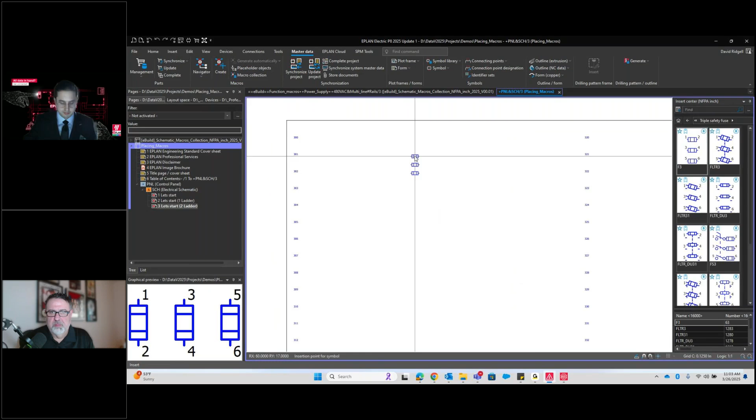So obviously in the most basic way to design, we could use symbols, right? We can go and find a fuse from the Insert Center, and this pulls from our symbol libraries in the project, of course. And then hopefully our plot frame may have some invisible stuff like this to help us stay nice and symmetrical, right? And then you can place some contacts, motor, all the different things you may need, click and drag.

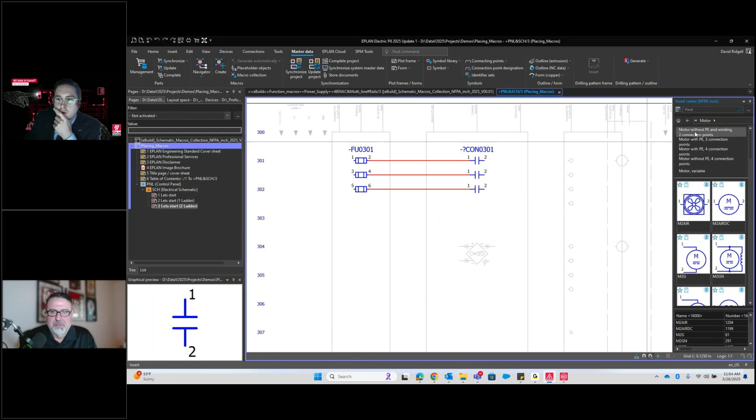You can go get a motor perhaps, power consumers, motor with PE, get your three-phase motor, right? And we have a place where to place it. Okay, so that is by far the most basic approach in EPLAN, unless we were drawing lines and text. Hopefully we're not doing that. And there's a time and a place for this.

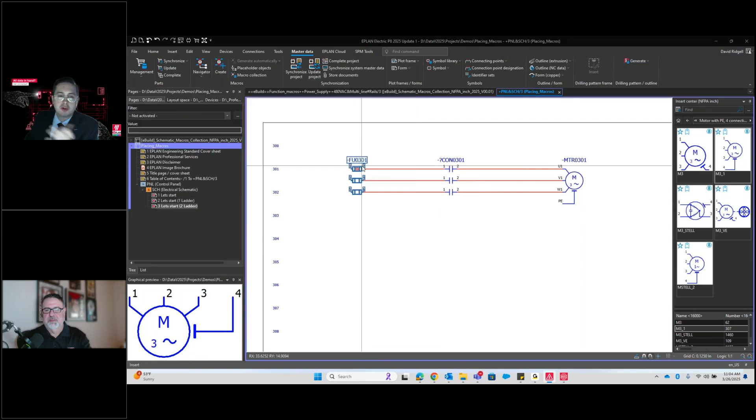Sometimes we may not know our part number and we need a symbol as sort of a placeholder. And you can of course add part numbers after the fact, go into your parts database, browse and find what you need. The problem with that is it's more of a two-step approach. So at the next level up, we would think about devices. In this case, I have to think about what symbol I need and then what device I want to place on top of it.

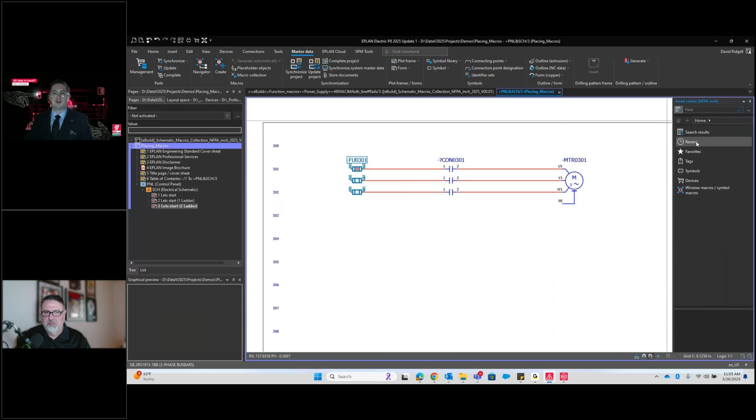The next level up, of course, is using devices because then we're thinking directly in terms of parts. If we know the part number that we need in our project, it's advantageous to use it in this way because it's one step instead of two or three, right? I can just take this part here, get the correct variant, and then place it.

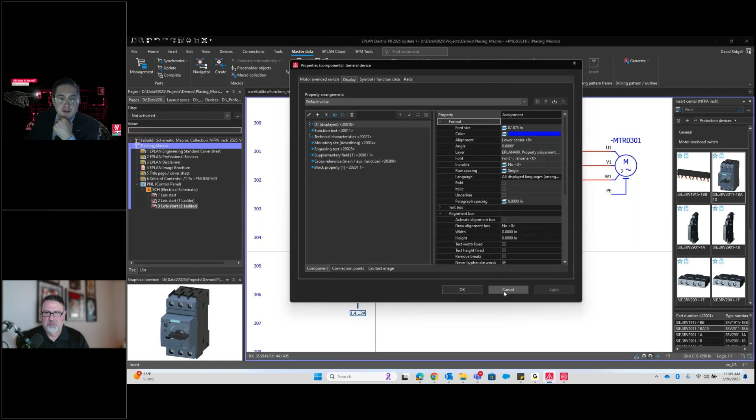And then, of course, in the background, it has all the technical information that comes from the parts management, the technical characteristics, the current range, and whatnot, and any other properties we can display here in our normal display settings. So that's certainly more efficient, but the most efficient way, besides an automation tool, would be using macros. And this is important because these are the true building block of everything EPLAN, right?

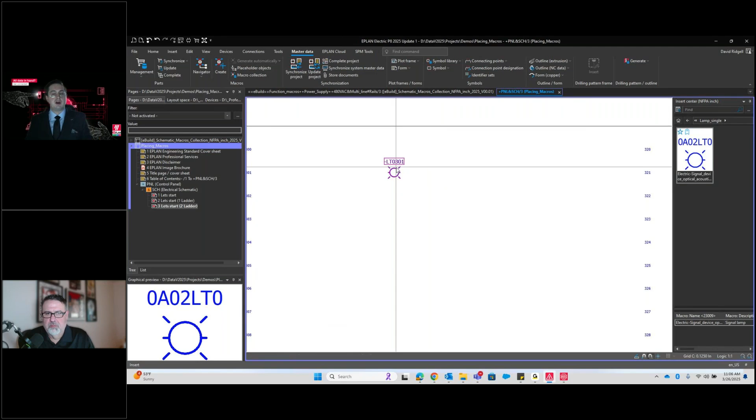So you could use symbol macros and part macros, which are tied to symbols. In this case, this is basically a symbol, but it can have some preset logic. For example, if we had some different logic that wasn't normal here, we can preset that up and save it as a macro. So that's another method. Another way is a window macro.

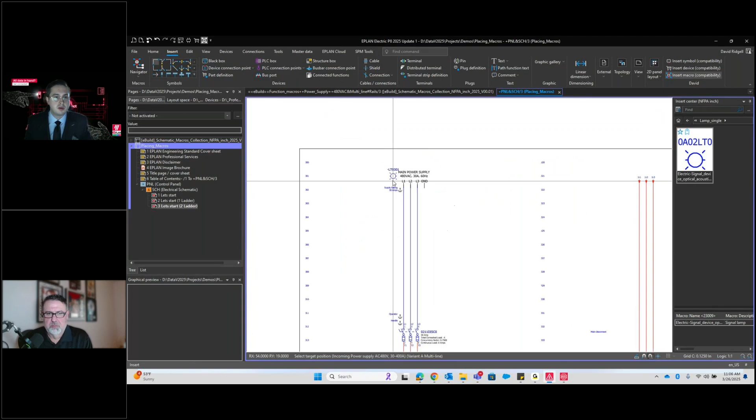Let's go to our window macro folder. Power supply. Okay, let's get the 480 volt stuff. In this method, we're really combining pieces of a circuit. So we're not placing individual components. We're placing a whole circuit or a portion of it. So I have this fuse disconnect, for example, and I can just place it to where it's designed to go.

And in the background, a macro will have two types of variations, right? It'll have a graphical variant. If you hit tab on the keyboard, you can toggle through that. An example of that, which we'll see in a second, is a motor circuit. Maybe it has one that's reversing or one that's direct as far as the contactors go. But we also have a non-graphical variation, what we call value sets. So this can drive any number of properties in the background.

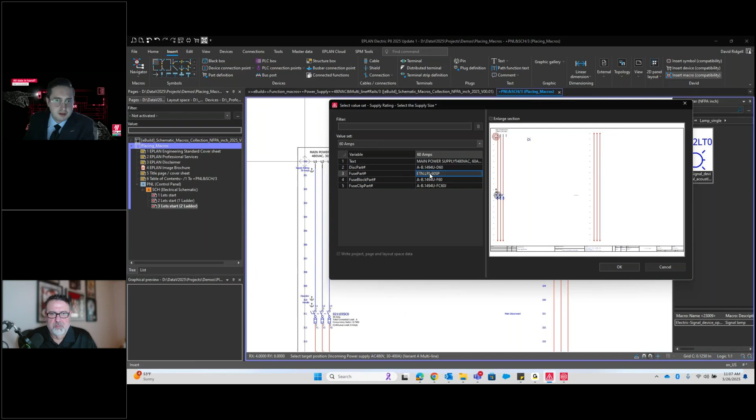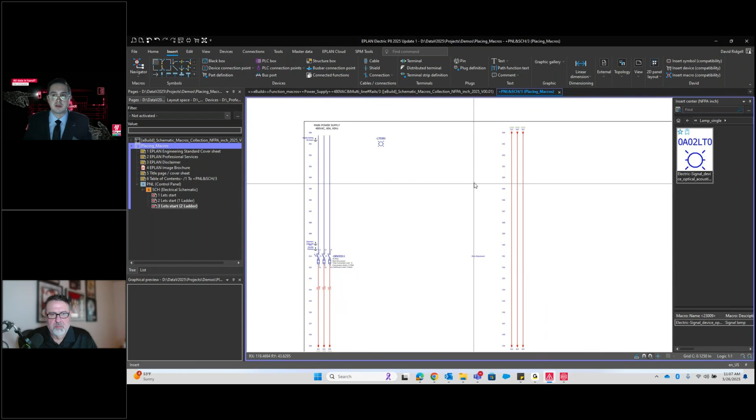So in this case, when I select 60 amps, I'm driving the path function text, the disconnect, the fuses, and any number of properties that I need to control. We can select our disconnecting means. That, of course, has an effect on the part number. And then the handle, I'll go with the painted handle there. Okay, so in this case, I brought in an entire circuit, more or less. And I can repeat that process to build up my schematic.

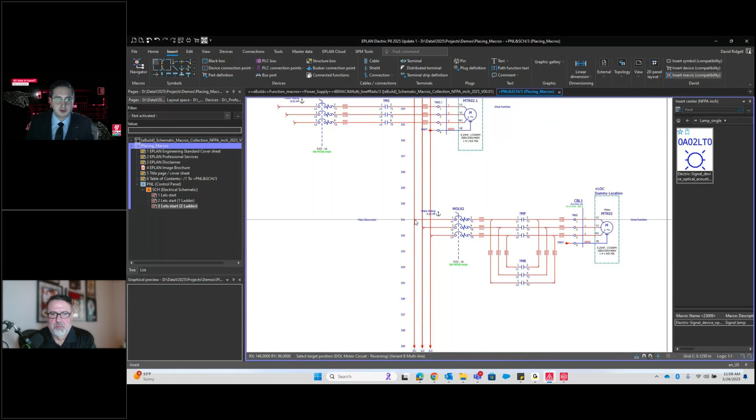If we go back, we'll go to our motor circuits. When we look at this one, double click. Oops, I accidentally placed it. I'm just going to hit cancel. I'll delete that one later. And this one will have a graphical variation. So if I hit tab on the keyboard, you'll see some different options. So I can go with this reversing one here. And then you can select your horsepower.

And as you can see here, we're driving 9 different properties from this value set, where you would normally have to go and think about changing all these, looking at data sheets. Okay, if it's this horsepower, I need this protection device. If the wire goes up to a certain gauge, we need to change the terminals. When you're setting up these value sets and these macros, you're thinking about that one time and not over and over. So yeah, you'll set up the table.

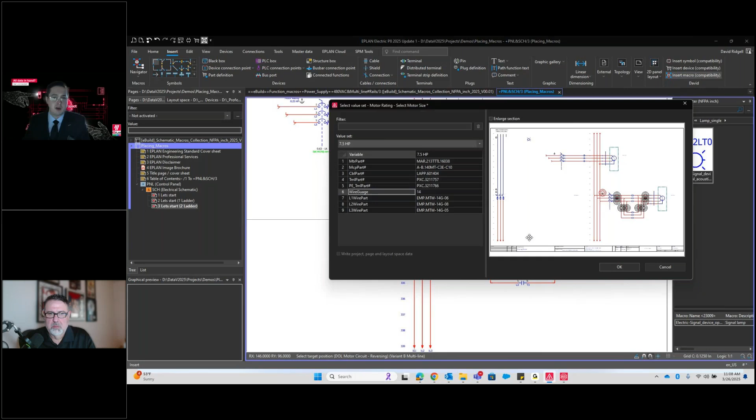In this case, this is actually public data available for everyone, and I'll show where that's at. But you set it up ahead of time, and then it's available for you in the future, right? That's the whole idea behind a macro. Go ahead and delete that and delete that. Of course, we can move it up, and we could renumber everything as well. Okay, so we renumbered our devices there.

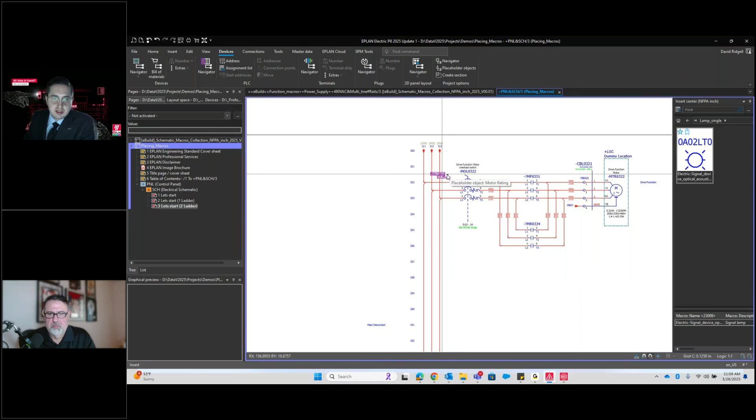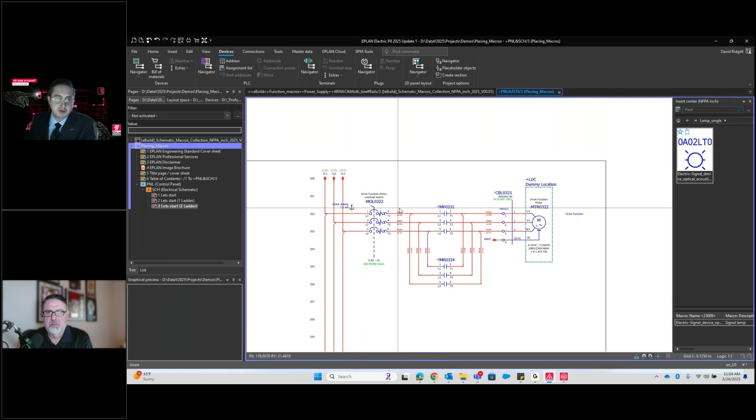And these are very important because these macros are the building blocks for everything automation. So that's our next step, right? We want to take things we would normally do by hand and set some rules up where the schematics will be automatically generated, in other words. But without good macros, there's no way we can do that. We have to use these as our building blocks. So think of them as like Legos or whatever the case may be. We modularize our schematic where we can build up the entire project, basically.

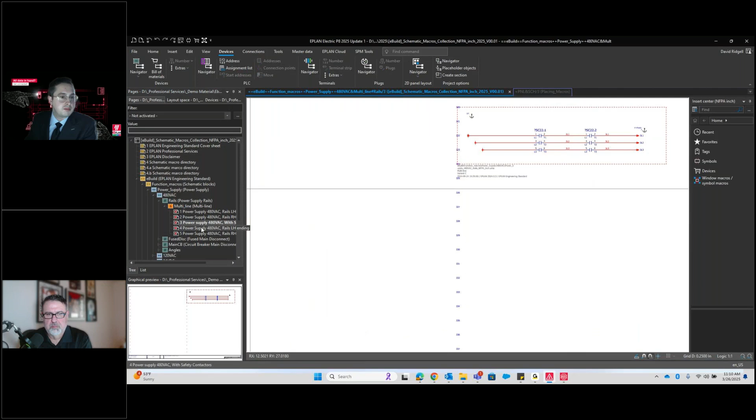And what it looks like in setting it up, here we have the macro project our automation configurator is based on. All right, so we'll always need some power rails, for example. We may need it on the left or the right. We have these different variants. We may need some safety power contactors there. We may need a separate variant for our power when it ends. If you think about the end of the power rails, we don't need it to go onto the next page to nowhere. And then of course we need that on the right.

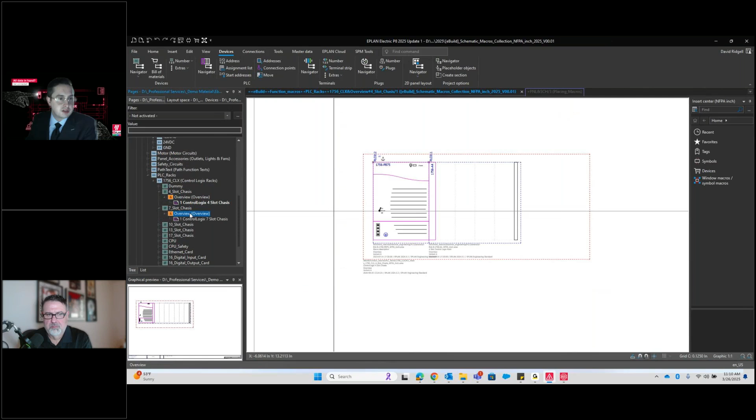We also need, of course, our PLC configurations. We'll have different configurations for a 4-slot chassis and the ControlLogix product line, 7-slot, and so on. So all this has been loaded into our configurator, and we have different rules to trigger when different devices are placed. So we can go ahead and switch over and look at that.

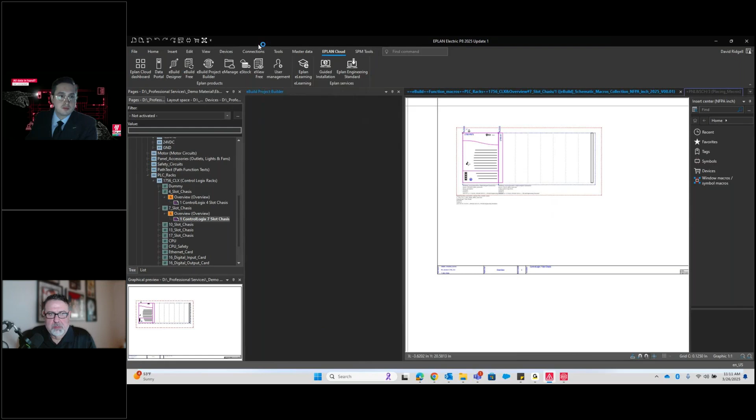The main automation product that we offer is called eBuild. This is the successor product of Cogineer. Some people in the past probably have heard of Cogineer. The difference is that this lives in the cloud instead of on premises, right? So we'll open up the eBuild project builder. And I'm just going to make it full screen here.

Hey David, while you're doing that, a question real quick: are these macros that you're using out of the box, or are those ones that you created? Yes, they're out of the box. Okay. I did make some modifications. For example, when you see this ending rail, I had to make that, but that's very simple. You just take this one and delete those guys down there, right?

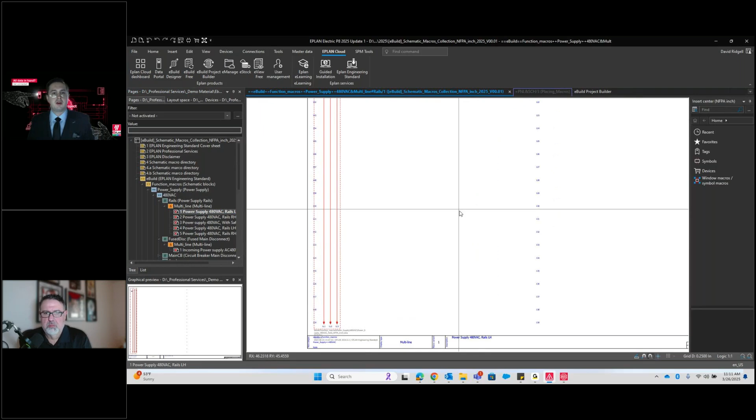I'll show you where you can find this. If you click on the Eplan engineering standard, it'll take you to this web page. And there's a lot more than just the macro projects here. If we look at what I'm currently working with, I'm working with this macro project for schematic blocks in the NFPA inch environment. That's what all these macros are based on, but of course I've made some modifications. We have an IEC version of that as well. And this is always a great starting point for a macro project, because it's very structured.

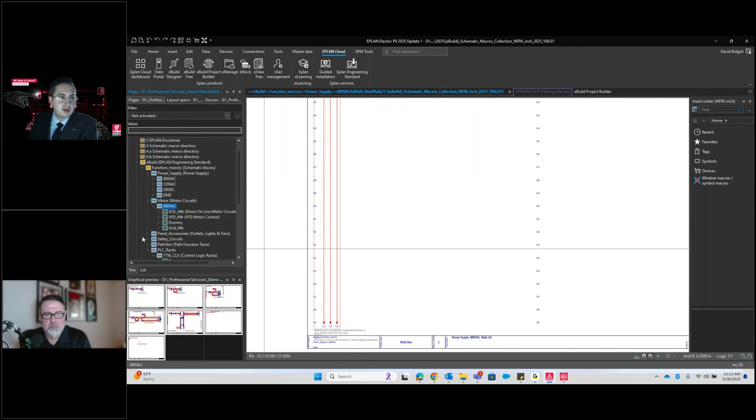If you look here, it's all structured under these different categories. So everything's nice and organized, and then we can, of course, automatically generate the macros. There's also some other neat things here. You have a basic project for your normal schematic project. Here it is, basic project for NFPA, so that'll be in the inch environment. If we open this up, you have the inch and the millimeter actually.

There's also some good application examples and samples. So if you wanted to look at best practice for ControlLogix and distributed Point I/O, or the Siemens version of that, S7-1500 and ET200SP, we have an example of that. If you wanted to have an exercise in trying out our smart production software, you can download that. So that's where I got that from.

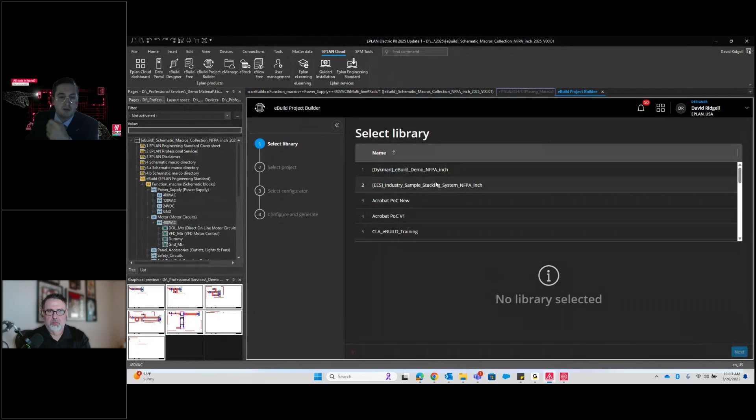Let's flip back over to eBuild and let's create a new project. We first need to select our library. In eBuild, you can have different configurators for different things. So I'm going to select the stacking system, and I'm going to select the most recent published version there, version 4. Okay, and I will create a new project. You can either create a new one or add to an existing one.

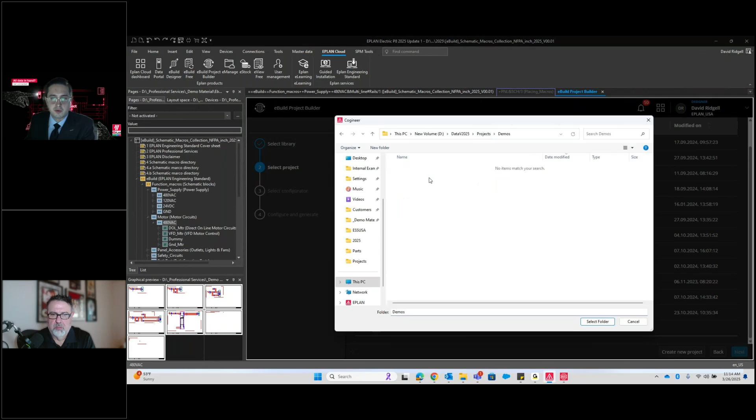And we'll just call it eBuild demo 032625. We need to select the template. Just like if you were creating a new project by hand, you need to select a basic project. That's what this is asking for. So I have one specifically for this eBuild environment. Select that template, and then we'll select our storage location. Put it in this demos folder. And then we could select overwrite or do not overwrite. In this case, it's a new one, so either one would have the same result.

And then we select our configurator. You can actually have multiple configurators in one library. In this case, I just have one, complete config is what it's called. So we'll select that. General parameters, these could be different options to start. For example, I need some kind of incoming power. Do I want to use a fuse disconnect or a circuit breaker? When I select that, you may see some different options appear. So I need to select what amperage of my circuit breaker. Let's go with 100 amps.

How do I want to disconnect this breaker? We'll go with the 4-foot cable with the painted handle, for example. Do I want to add the optional transformer? And for my 24-volt supply, what amperage do I want to select? What about the safety relay option? We can select this one here with the contactors and the reset with an expansion relay. For the 24-volt distribution, we can either select the single pole breaker or the electronic circuit protection.

And then you have the general project properties that you would normally fill in by hand, the customer code and all that stuff, where they're located. Schaumburg, Illinois, and put that in. Okay, and then I'll just type eBuild demo. And then this is a really neat option. We can either generate the reports or not. For the first run, we'll do it without generating the reports, and then we'll come back and see how easily we can add them in, right?

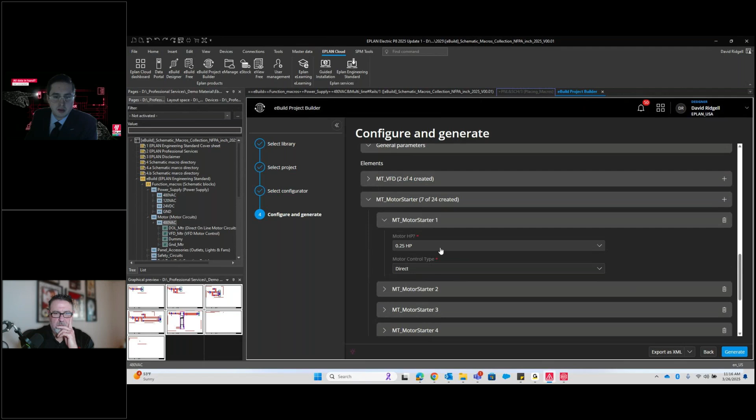And then we'll select our motor starter circuits. We'll go ahead and select 7. And then we'll have the different options of direct or reversing, what horsepower. Go ahead and set those. I'll leave a couple as direct just to show the contrast, the difference. Set that as reversing, set this one as direct. Just picking some random values here.

Okay. And then we'll create a PLC system. We'll create one system. Think of this as one rack more or less. I'll call it rack 40. And then we'll add our cards. We have up to 17 because this is a ControlLogix chassis. So the largest rack you can buy is a 17 slot. So I'll select 7. The neat thing is it'll automatically go to the next largest size. So if I were to choose 8, it would go with the 10 slot rack.

So what type of card? We'll definitely need a CPU. I can either make it a safety or a standard. I'll go with the safety CPU. We'll place in a communication module there. We'll go with the 16 digital input, 16 digital output, 8 analog in, and then for this one you'll have different options. Do you want to use differential current or single-ended, or all the other options here? I'll go with single-ended current.

And for the analog outputs, we have to select every channel. Do you want it to be current or voltage? I'll leave all of them as current. And then the last card will be a filler module, basically just a cover for a blank slot. We'll go ahead and generate this.

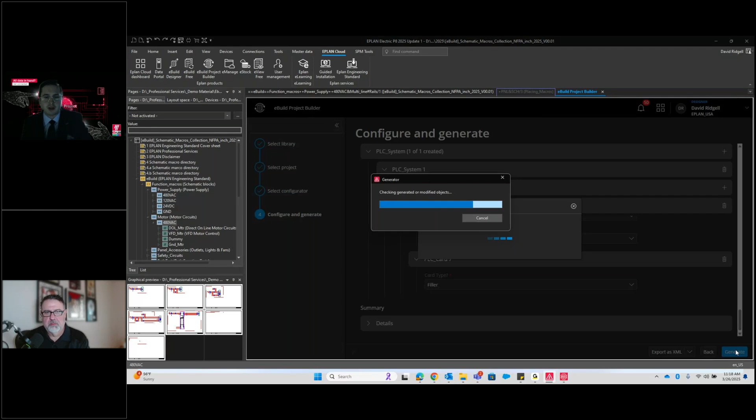David, while you're generating that, let's talk about how the adoption implementation really helps prepare you for the automation that you're showing in this webcast. Yeah, so when you're going through an adoption package or any Eplan consulting for that matter, you'll always be educated on the whats and whys and hows of a macro. How to set up a macro project, why do we need a macro project, what's the benefits of modularizing our schematic. So you'll typically create a pilot project, and then we extract your real circuits and real building blocks from that pilot project, so it actually applies to what you're trying to build, right?

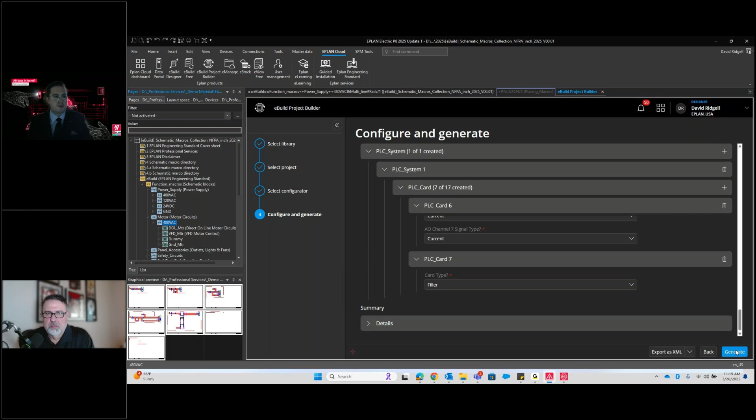Because there is a misconception about the automated tools that we have. Oftentimes people think, oh, we have a lot of one-offs, we can't use it, but in reality, oftentimes their schematics will look and feel very similar. Obviously, there's different components, but we always have motor circuits, maybe we always have incoming distributed power, we have control voltage, safety circuits, and many times those things do look and feel the same. The components in the background may be different, but we can of course still utilize these automated tools.

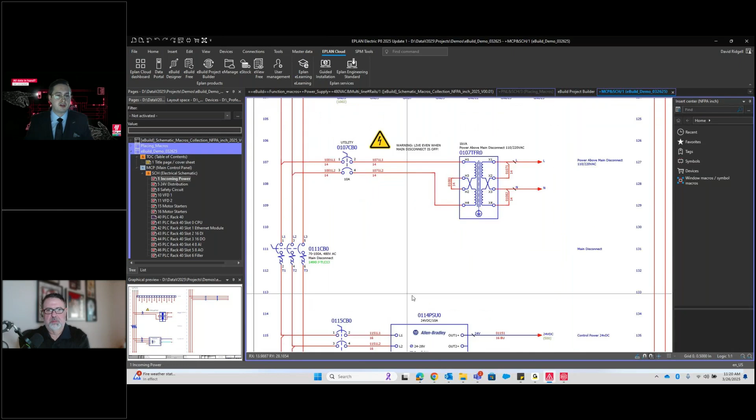And as you can see, the project was created in seconds. We didn't generate all the reports, so all we have is the title page that was already included with the template. And then we have all of our schematics, right? Based on the different options we selected. So I selected that transformer. That of course gets placed. Remember, I selected a 100 amp breaker, and it actually renumbers everything. You'll notice all of the device tags are according to the NFPA standard, so we can certainly utilize that as well in the automated tools.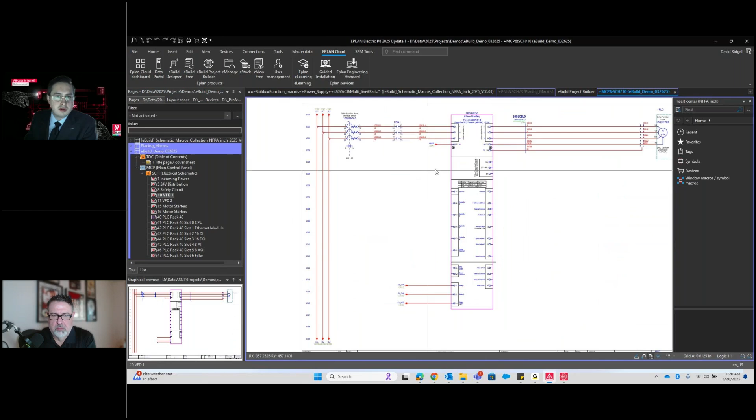We have our control voltage. We have our safety circuit based on those different options that we selected. Remember, we selected 2 VFDs. And then on the last one, you'll notice the power rails end. So these automated tools have a lot of logic in them. You can basically make a statement that says, if this is the last of whatever circuit, make sure it ends and doesn't continue, right? More of an if-then-else statement almost.

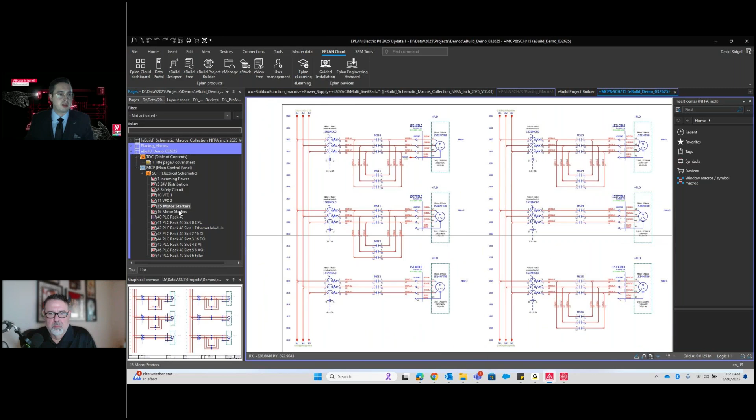And then same thing here. This is why I wanted to choose 7 motor starters, because you'll see when we get to the 7th one, it knows where to end. So you don't just have power rails on the bottom going to nowhere, right? You'd have to go and delete those later.

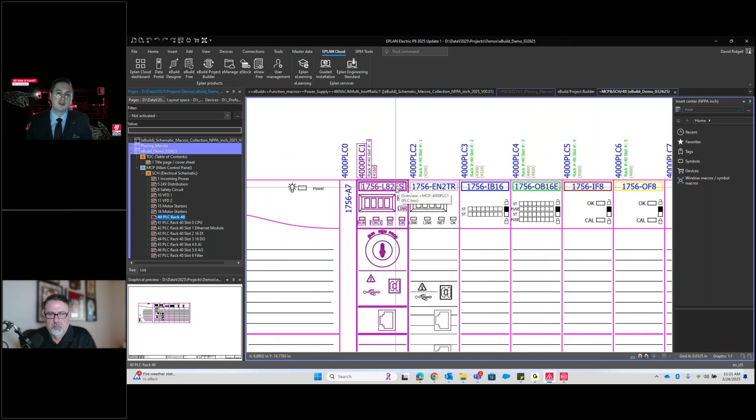It built our rack, and it automatically names all the slot numbers. You can see that based on its own intelligence. All we did was define the rack number 40. So it names everything rack 40, but the slot numbers are automatic. The neat thing about that is you can go ahead and do your addressing.

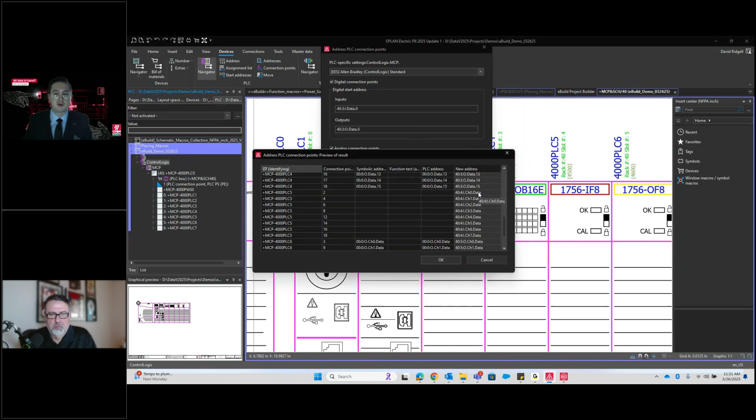So I can go to my PLC navigator. If we look at the navigator here, you'll see the rack configuration is already set up from eBuild. We didn't have to fill out any of that stuff. All you'd have to do is just address, make sure you're using the right standard. For this case, the Allen Bradley one is correct, and do your addressing, and you'll get all of your addresses, right, based on the rack and slot. And of course, you can jump over, and you'll see all those filled in here.

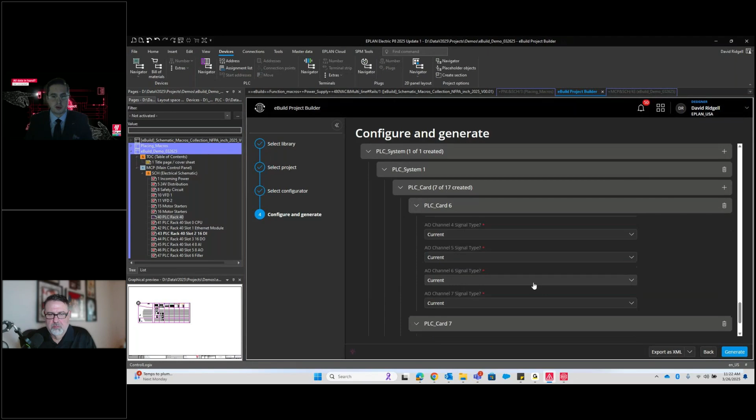Okay. Now we can do it with the report. So let's flip back over to eBuild. This time we want to go back up and check that option to generate the reports. Go and check that and then hit generate again. You'll see it's doing all that. It says running script, right? That's what's happening in the background to run those reports and whatnot.

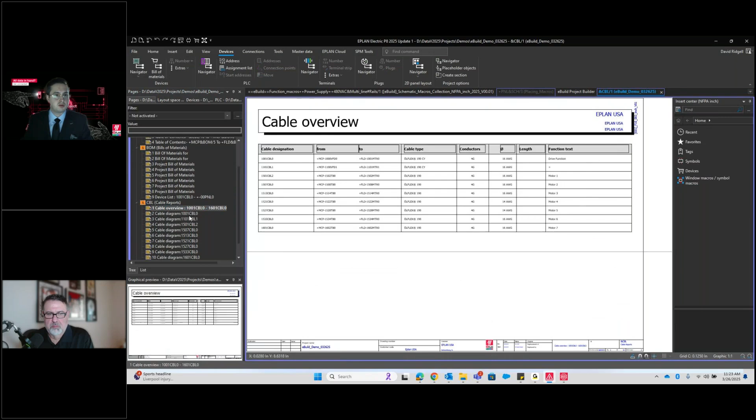Now you'll see, in addition to all the schematics, we have all of our reports. Of course, the title page was there to begin with, but now we have our table of contents. You have your bill of materials. We have our cable reports, cable diagrams, cable overviews,

our connection list. This is stuff that basically leaves the panel. If you go inside the location, we'll see the same thing, but these are everything internal to the panel. Of course, our terminal reports, terminal diagrams, and whatnot. So all that was handled by the automated tool.

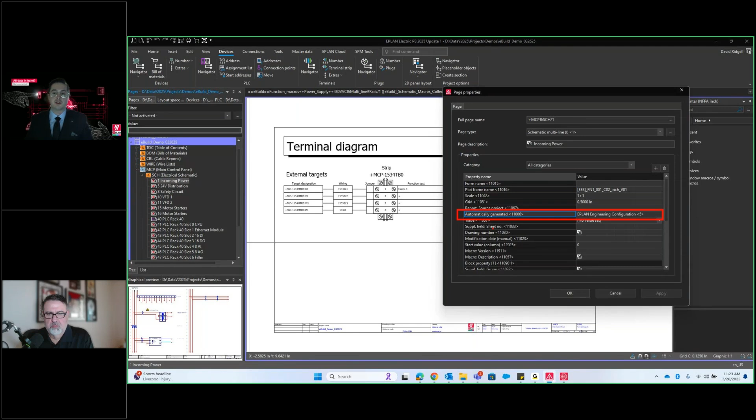And we can protect ourselves. So if you wanted to lock this project after the fact, you could open up your page properties, because every time something's automatically generated, it will say, hey, I've been generated from, it says Eplan Engineering Configuration, but that's the same technology that eBuild uses. So if I was to set this to no, that would actually protect it from eBuild overriding it again.

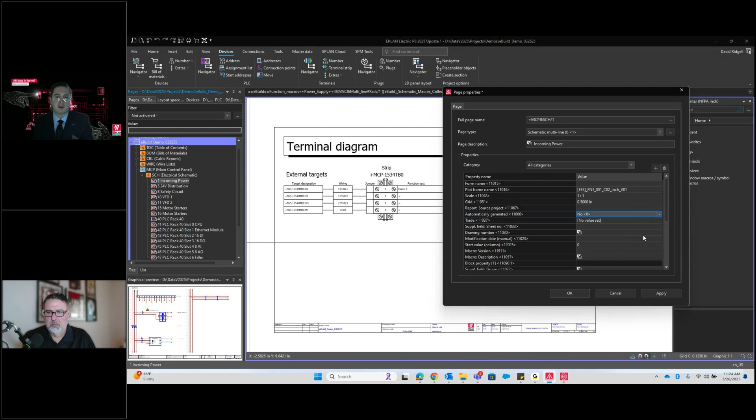So if you said, hey, this project's at a good enough state, I'm going to go ahead and do everything else by hand, you could set that to no, and it'll be protected from there. Because oftentimes you don't necessarily automate 100% of your project. You could automate 60, 70%. Get everything more or less kicked off, and then go fill everything else by hand, right? It's certainly still an efficient workflow.

Any questions about any of that from your side? We have a few questions, which are a little bit all over the place, that I can start asking if you like, because there's some really good ones in here. Okay, fair enough. Is there a way to create a macro which has its own part number?

Yeah, well, you can apply a macro to a part. If you open up your parts management, for example, every part has a number of macro properties. You have your standard macro. This one has always been there as long as I've heard about Eplan. This is your standard schematic macro, and then since version 2023, we have these different standard specific macros.

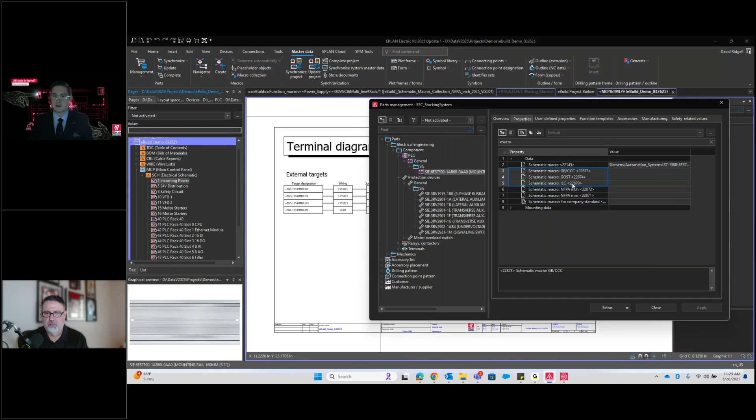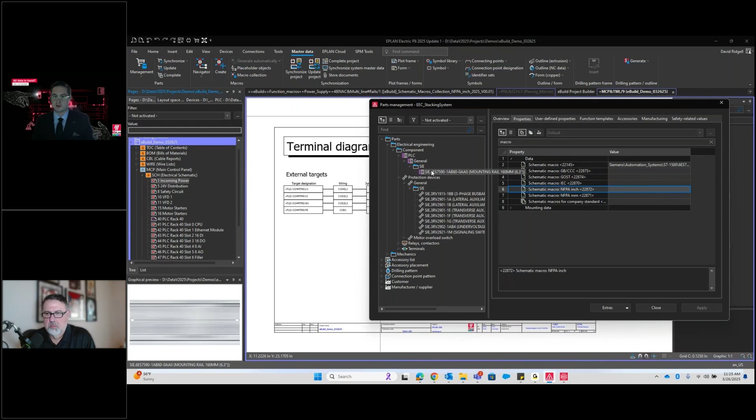where it's basically intelligent and knows, hey, I'm going into an IEC project, use this macro, but if I go to an NFPA inch, use that macro, right? So we don't need different parts for different standards. So in that way, yes, you can make a macro, apply it to a part, and then you're placing that by the part number. But a macro can also have several parts, like those window macros that we placed into our eBuild from eBuild. Everything here came from a macro, right?

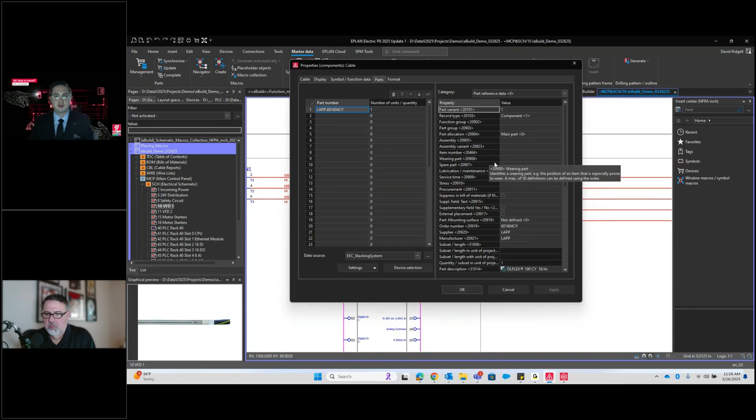But in the background, there's several devices. You have this protection device here, VFD. See a part number there, of course, the cable, right? And then the terminals and whatnot, if we needed those. And all that's generated or controlled from those value sets.

So just like when we place by hand, we had to select, hey, I want this amperage of a breaker or whatnot. Those same values and options get passed over to eBuild. So that's really all that's happening in the background. Everything is just triggered from a configurator instead of placing it by hand.

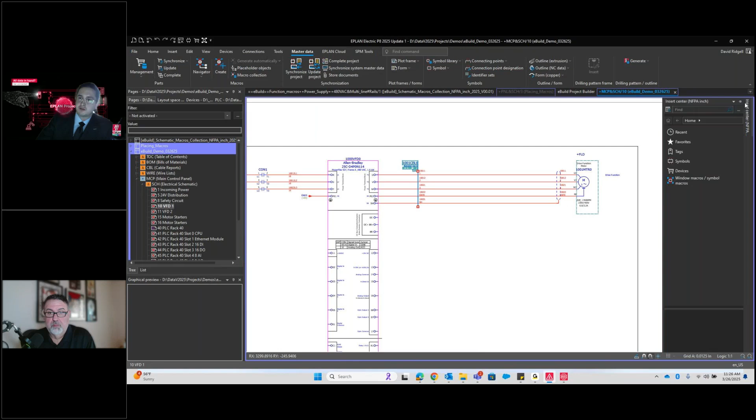Another question is, how do you launch the insert center? The insert center is always there. And if you don't see it, it could be that it's not pinned. If you see now, it's a flyout when I hit the pin button. But you can't actually close it if you're in a schematic, right? If you have a 3D layout space or a 2D schematic open, the insert center is always there.

Unless you're in an older version, if you're in something older than 2022, the insert center did not exist back then. So it was a different workflow to place things. That's the big womp womp, right?

This one is one that I think I know the answer to because I saw you do it earlier. Are there NFPA macros in millimeter available too? And I think that you showed that whenever you went to where you could find all of the macros. Yes, that's a good question.

There are macros available, but also one of the things about NFPA millimeter is it typically uses the same grid spacing that an IEC macro will use. So oftentimes it's pretty easy just to flip and rotate the IEC macro to get it into an NFPA millimeter format, because those connection points will use that same spacing.

Next question, can I have a macro in a macro? For instance, I have a macro that has a circuit configuration that is common among lots of HP sizes, but I want the CDP to only carry the wire size for the HP size. Wow, this is very detailed. So if you could talk through that.

You can certainly have macros inside of macros and then regenerate larger macros. A lot of macros there, but yes. When you have a macro inside of a macro and then you regenerate it, those are called subordinate macros when they're placed back into the schematic. And whether or not they get updated, there are some rules there, but as long as it exists in the larger macro when you regenerated it, that's how it's going to be placed, more or less. So yes, you can have many nestings of macros inside of macros. It's not a problem.

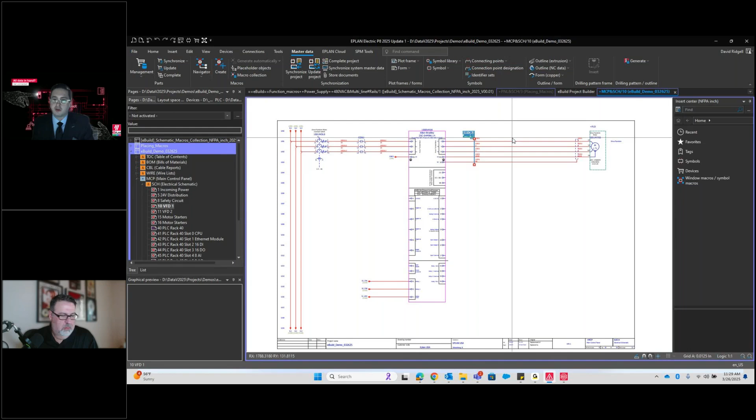So if you're placing 8 motor circuits and you want them to be stacked on top of each other, in that case it'll use the macro box dimensions and stack them one by one, right? And you can also just place on the original coordinates. Every macro, when it's created, think of it just like if you copied it. If I generate this motor from this position, let's pretend this is a macro project. When you go to place it, it's basically like copying and pasting.

So when it hits XY enter, that same coordinate it was created on, that's where it's placed. You can also use that same technique in eBuild, just say use the original position, and then it'll place it on the exact coordinate where it was created. Good question.

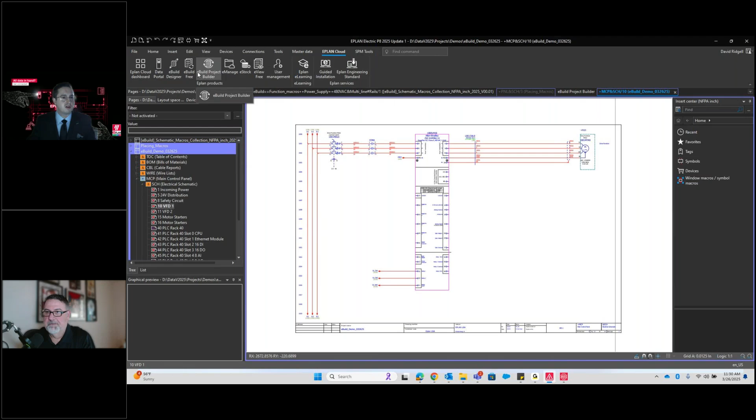The next one, does the configurator only work with ControlLogix? What about CompactLogix or Micro850? What about anything other than Allen Bradley? It will work with whatever you set it up to work with. This is something I built probably about a year ago. All those options are up to the person that programs it. You can use Siemens, Allen Bradley. As long as you have the macros, you can program them into your designer.

So this is the other side of eBuild. This is what we call the designer. This is where you build the different rules. If I go to my stacking system, this is what we just looked at, and this is the back end of it. What do we need to build this? We need a macro project because that's how we add the macros in. On a basic level, you of course need a blank page. That's pretty much always the first element.

So here we have a page macro. It's always placed. You can preview it. It's just a blank page. In this page macro, we'll have different variables. I made a variable for the plot frame because in the NFPA world, we need a few different options for 0 ladders, 1 ladder, or 2 ladders. In this case, I told it always use the 2 ladder one. So we have to make sure we plug that in.

And then we place the 24 volt distribution so that it has the rails first. There's a different option of the rails depending on what you need, so you'll see there's this dependency. It says if the DC distribution type equals electronic circuit protection, then it places this rail. If it's a single pole circuit protection, then it places the wider rails there, because we don't want to place both of those. That wouldn't make sense. And then the same thing down here.

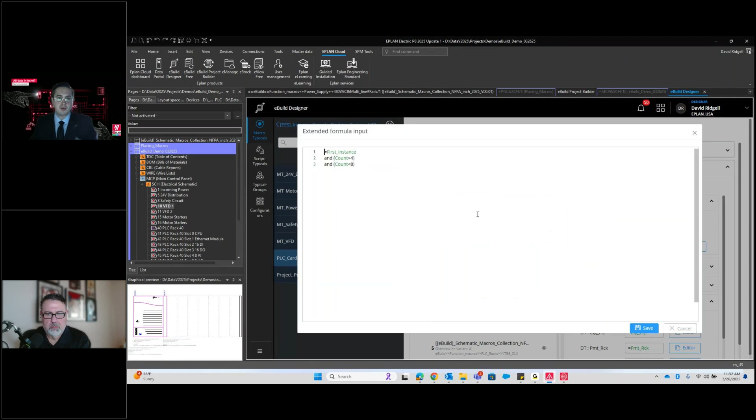Of course, we need a page. We need an overview page. And then you have your 4-slot chassis, your 7-slot, and you'll see the different rules. So this says only place if it's the first instance and if the count of cards is lower than 4 or less than 8. Because if it goes up to 8, then we go to this one. If it's between 8 and 10, basically.

Right? Because if you didn't have those rules, Eplan is going to try to place racks on top of racks. And then you have just standard Eplan errors. You can't place a symbol on top of a symbol, right? Same thing in the automation tool. It's just doing things we normally do by hand, but much faster. Okay. If you'd like, we can also look at another automation tool that we have that'll also automate the 3D panel design as well.

Unless you have another question, feel free to. Yeah, I was going to ask you, are all these features available with eBuild Free? Not eBuild Free. So eBuild Free is some examples that anyone can run. You can run through and check those examples out. It doesn't give you access to the designer, so you can't go in and make changes to it. But it does give you an idea of kind of the workflow of how the configurator works.

Here you'll see several different libraries in the eBuild Free. I actually use some of these for my library. So this script examples, for example, that's how I included a script to renumber all the devices. And you'll see that there's a lot of those examples here. Renumber cables, renumber devices. You can make it export PDFs, back up the project, so on and so forth.

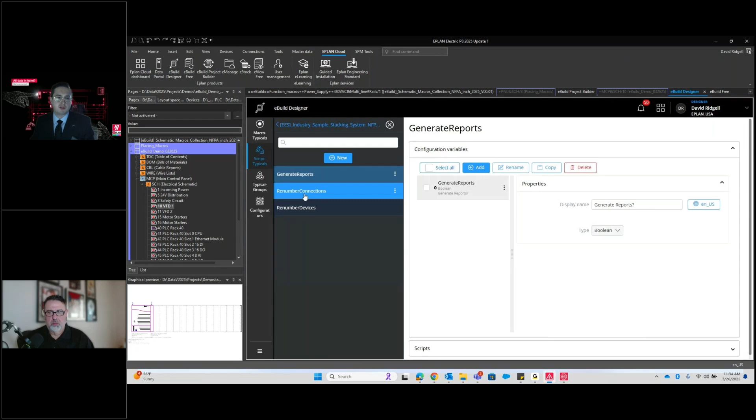And if we go back to the designer, we have what we call script typicals. These are my different scripts I use to, let's say, generate the reports, renumber the connections, and renumber the devices. And then when you download those examples from eBuild Free, it gives you a whole PDF or Eplan page that'll tell you how to actually set that up and what parameters you need and all that, right? So it's not magic. I didn't just wake up and know what to put in here. It was all described in that document, so it's pretty intuitive, right?

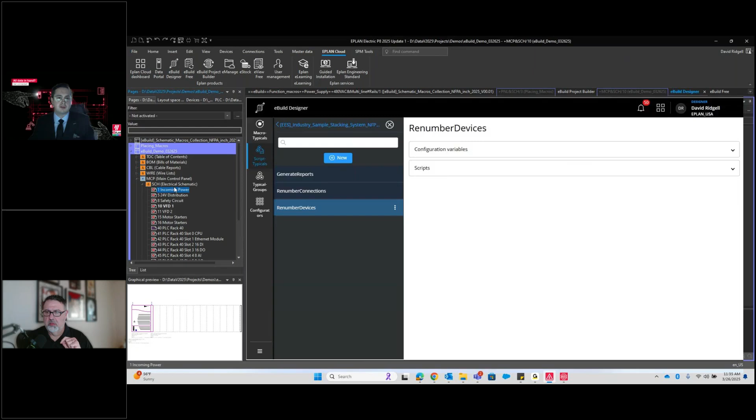Now, if you create a page macro, can you build or create a new page with all the parameters updated without using eBuild? Yeah, you can change after the fact for sure. So once you create any of these things, you can certainly make changes by hand. So I can come in here and change the description, incoming power 480 VAC. I could go place additional circuits if I wanted to. I could go back, place a macro. Oops, let's change my grid. There we go.

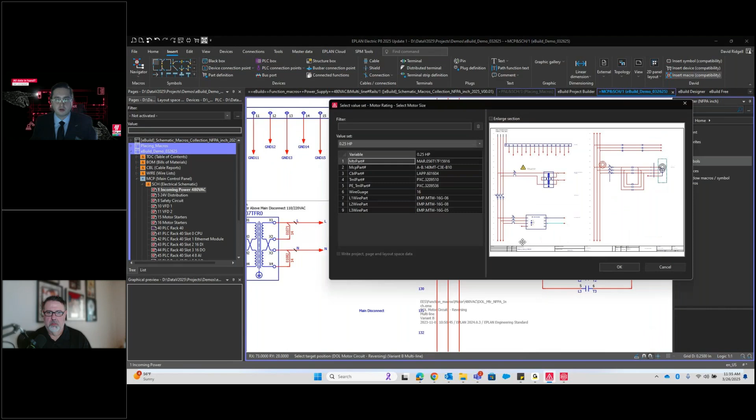Yeah, so you can always extend your project after the fact, and that is very common. Most people that use these tools are doing a large percentage of the automation with the tool, but not 100%. So sometimes we'll do 70, 80, maybe 90% of the automation and then come back and complete everything else by hand for all the one-off stuff.

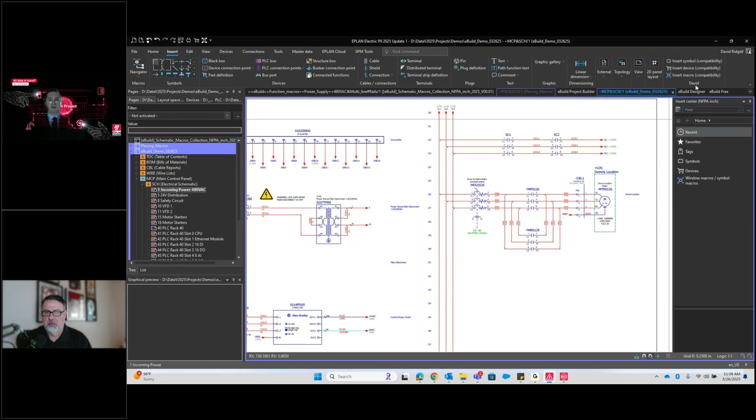A question that we've gotten a couple of times now in the chat is, what's the difference between eBuild Free and eBuild Designer? Right, so the paid version of eBuild gives you the designer and the project builder. It allows you to create your own configurations. For eBuild Free, you basically can just run these generic libraries that are here and just get a result in an Eplan project, right?

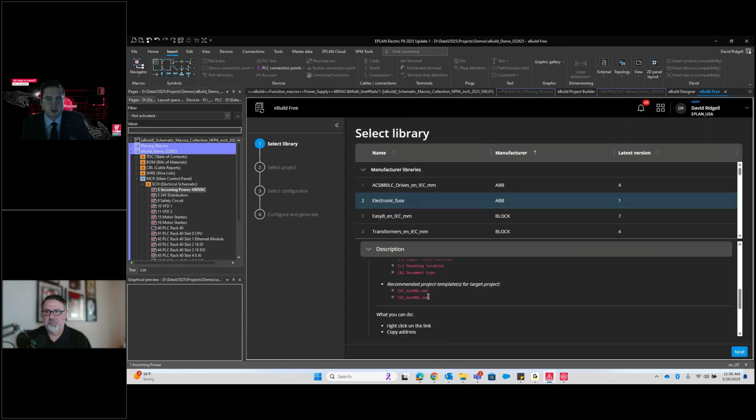So we have this electronic fuse. It'll tell you which template to use. So this one says use one of these templates, right? So I need to use the IEC basic template. Otherwise, the coordinates may not make sense. If you try to use an NFPA inch template on an IEC millimeter library, that doesn't make sense, right?

So we can create a new project, eBuild Free example, and it's told us to select this template, so that's what we'll do. Select your storage location, projects, demos, and go ahead and start that. Oh, here we have to select the option. So we have our configurator. Do we want to use this IEC page structure? We can apply our different structure identifiers.

Circuit breaker DT, I'll just select, see if there's a note. Okay, I'll just put CB1. Trip curve, I'll go with the C. 10 amps. Power supply, page number 1. There's a lot of different options, so you could set your potential. These are actually, looks like our terminals, right? So XE1, XE2. Let's see, okay, that should be enough to actually generate it.

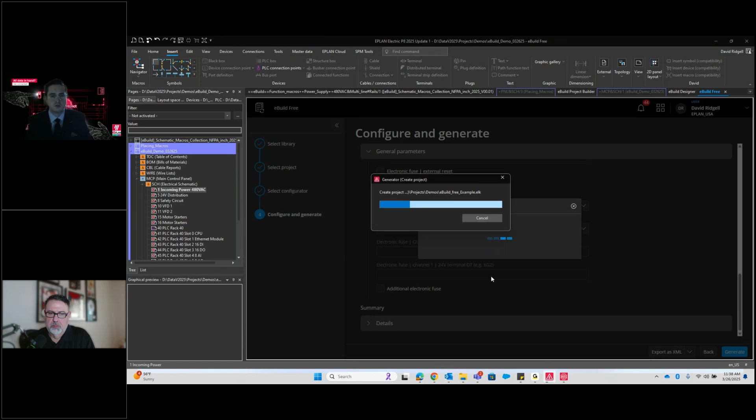Okay, so it generated that. We have our eBuild Free example. So it generates our power supply, and based on those different options that we plugged in, that's what we get, right? There's your title page and everything. Yeah, so that's basically what you get with eBuild Free.

There's definitely some cool things in there for sure, but the full-blown designer and project builder, you would need the premium version of eBuild for that. And we also have another product available called the engineering configuration. This takes it to the next level and allows you to automate the 3D side of things as well. So if you like, we can take a look at that.

Yeah, please do. I'm actually going to close Eplan because we don't need Eplan open for this. We could have it open, but we can just close it. So in this, basically the difference is we can automate different disciplines in addition to the 2D Eplan. We can automate 3D panels. We can create structured text documents if you wanted to have some PLC code written. It's really quite incredible all the things we can do.

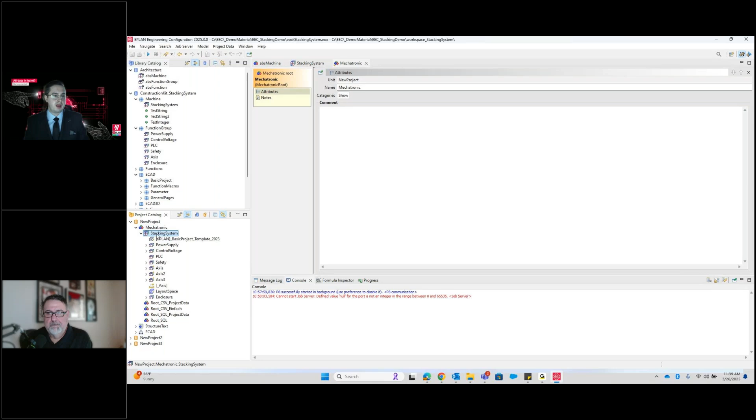So in here we have this project that's created. In the background there's many rules and libraries and whatnot. And then we have this user interface that's custom built. That's one of the differences, is we build the UI. In that case we have more flexibility than we do in eBuild. So I can select one of my customers from this list, select our input voltage, how do we want to handle that, terminal or a plug.

Do we want the options for a light and a fan? Do we want electronic protection or a regular breaker for the DC voltage? The different safety options, do we need an emergency stop or an indicator? How many axes do we want? So that will determine our motor circuits. I will select 4, select update extension points, basically make sure that we create all of the axes according to what I selected.

And then we have our axis configuration, and we can change these different options. How do we want to control it? I'll just select inverter for that one. And that should be good. We'll go down and just save it. Hit save and then generate the project.

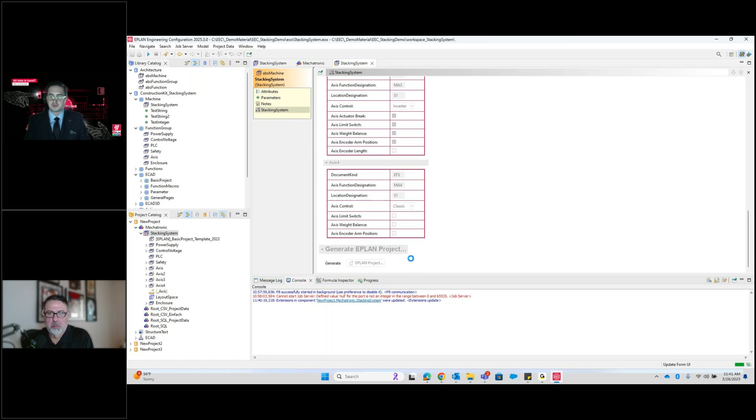Should I add theme music right here? Yeah, you can add like the Jeopardy theme, yeah. Yeah, that'd be a good one.

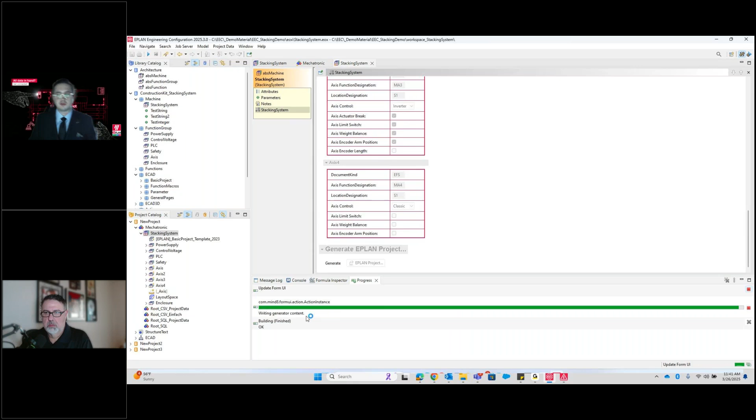Yeah, but in the background you'll see the progress. It's probably building the 3D right now is what it looks like. So yeah, there it goes. So just like anything else, when there's more data, it's going to take a little longer. But this one took a few seconds because there's 3D. It's literally building your 3D enclosure, placing all the rails and ducts. It's placing all the components, linking those to the 2D side and all that.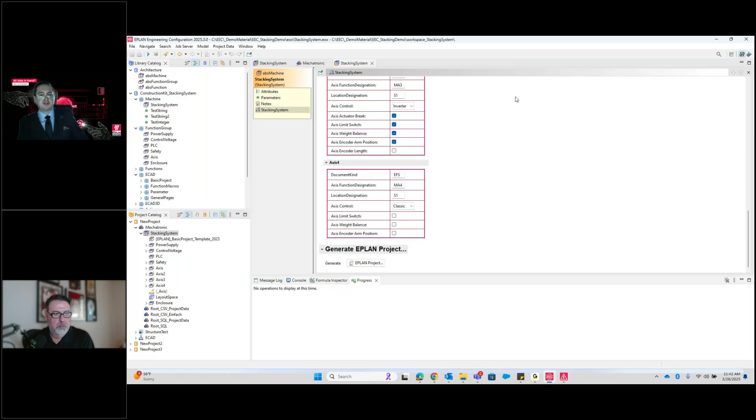You can see EPLAN remembers that eBuild was open, so it's still opening that. So I need to just make sure I close that once it initializes. Just close all that, close that. So this is the project that it created in the same way that we generated the reports from eBuild. It does the same thing. Very similar technology. Uses a script. It's actually easier to do this from EEC. There's just an option. You can just select true or false to generate these.

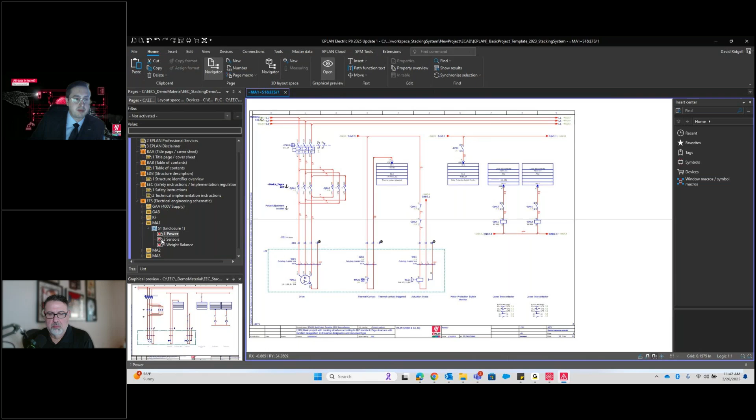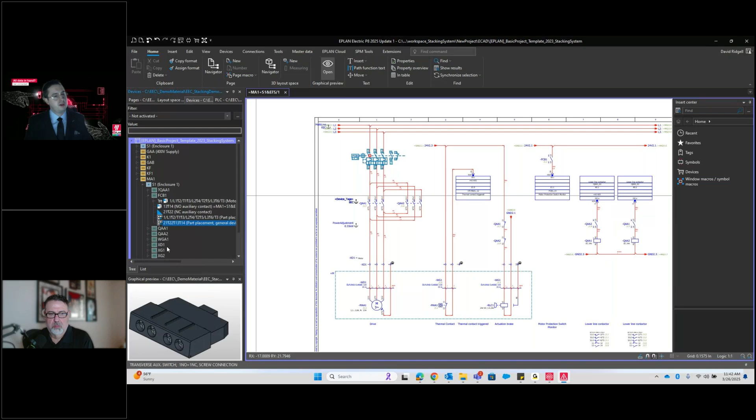Based on the different options we selected, it creates our schematic pages here. And what's the difference, right? This looks similar. Obviously, it's more of an IEC schematic, but the principle is the same. The difference is this also generated the 3D, and we can open the device navigator and see that. Okay, here's my function that's placed, but it also has the part placement. We have 2 part placements. So it places the main breaker, and then it also places our auxiliary contact right on top of it.

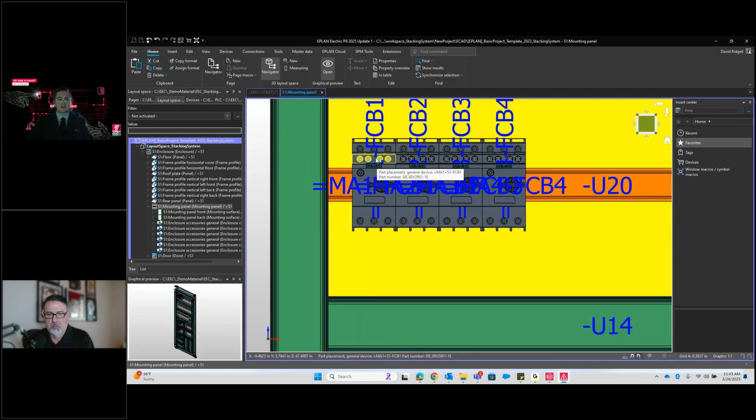So let's open up our layout space and have a look. So everything here was built by EEC. So it built all the rails and ducts, places our components, gives it the device tags, and of course that's what makes it link back to the 2D. And you can set these different offsets, for example. That's what happens here. That's why it's not right up against the end of the duct.

I can even go over here and say open in EEC, and then it finds that device in EEC. So it's very easy to troubleshoot in that regard. And you have a lot more flexibility in programming. For example, that's what this mate thing does here. What does all that mean? M4 are the different handles.

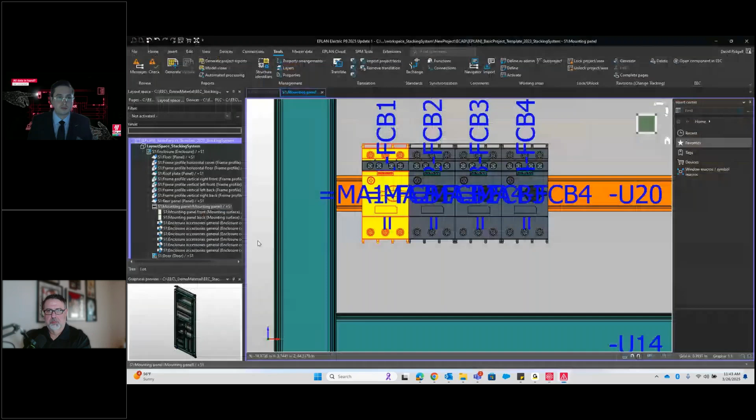So those are the leftmost handles, and then 25 is the millimeter offset. So I said, hey, take M4 is the left handle of this device. M4 is the left handle of that DIN rail. Give me an offset of 25 millimeters. But only if it's the first one, right?

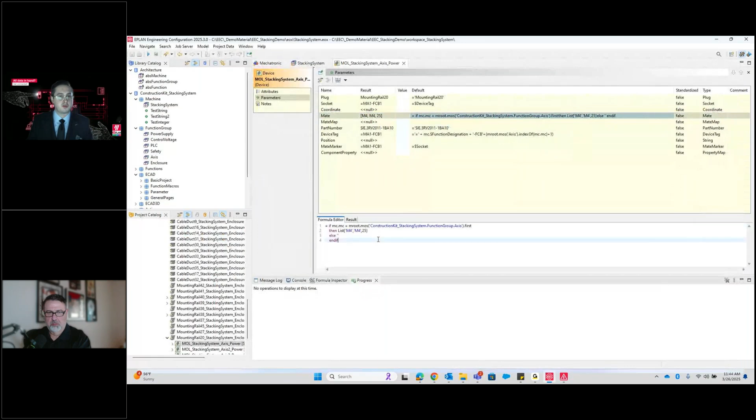So let's look at this formula. If mc.mc equals mroot.mos blah blah blah dot first, then list, basically do a 25 millimeter offset. Else, if it's not the first, do none. Right? So all this stuff may not mean anything, but it's basically asking for a relationship. Let's close this and go to the counterpart here. I can explain it a little bit better.

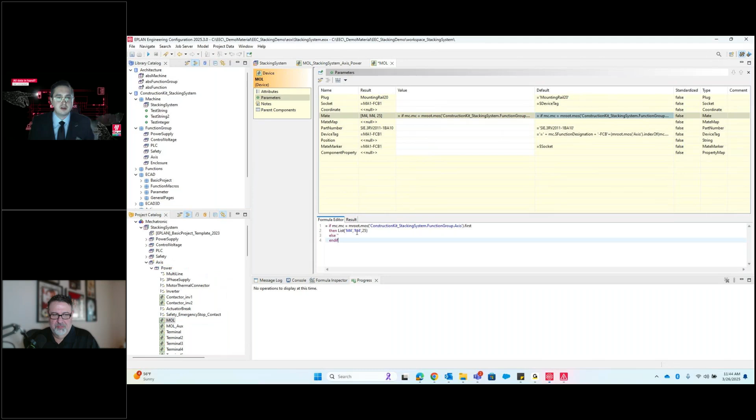Go to mechatronic. So if we look back here, we're at the mechatronic item. We'll look at that mate formula from this angle. So mc.mc means mc is 1 level up, mc.mc is 2 levels up. Now we're at axis. Now we're going to do a mechatronical object search for all the axis. So let's say we just did that alone. I'm going to comment this out real quick. Let's just have a look at that piece of it, just to illustrate the power of EEC.

So when I do this mechatronical object search, I'm basically asking, show me the objects in a collection. So I find four of these axes, right? That's these four. And basically the other component, I'm asking, is this the first one? If the axis I'm a part of, is it the first? If so, then do the 25 millimeter offset, else don't. That's basically what that does.

So yeah, EEC. Coming from, certainly. Yeah, go ahead. I was going to say, coming from a marketing background, this all makes a lot of sense. Well, thankfully we have training for this sort of thing, right? So anyone can learn it.

Another question that we had in the chat is, do you have to wear a suit and tie in order to be this proficient with the software? No, but I think it helps. You look good, you feel good, right? So no, I always do these for these webcasts. I want to show up prepared.

Do you have any more of this that you want to show us? No, I think we covered all the bases. Sure, we could go really in depth, right? We could be here for hours and days talking about all the things automation, right?